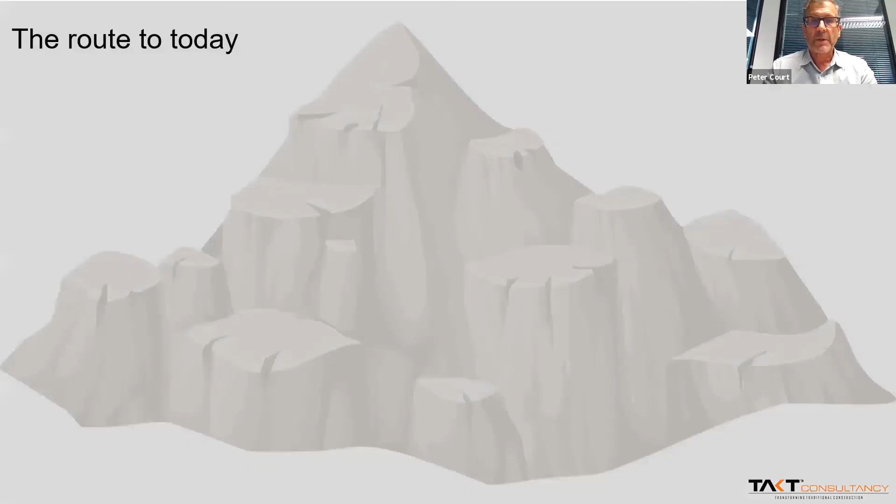So I'm going to whiz through this fairly quickly. I started life as a project engineer in ventilation, where we used to do our own drafting, engineering, and commissioning. And as you become better at that, you then get promoted. So that happened to me. I became an operations manager in a large ventilation company, ABB Flakt.

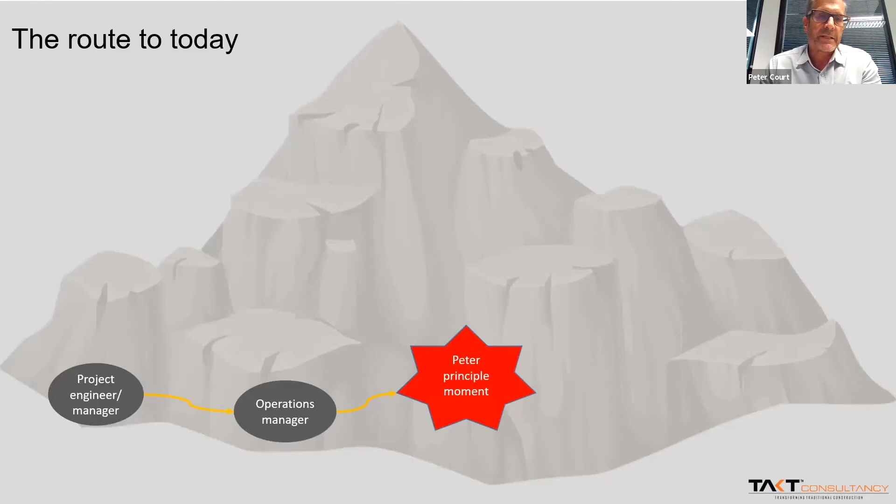And that led me to believe, by becoming an operations manager, that I'd hit my level of incompetence, I call it the Peter Principle. So I had a realization of that at that time. So being a self-developer, I undertook a diploma in management studies, because I thought, well, I'm an operations manager and I need to learn how to manage people, not just projects. So that made me a slightly better manager.

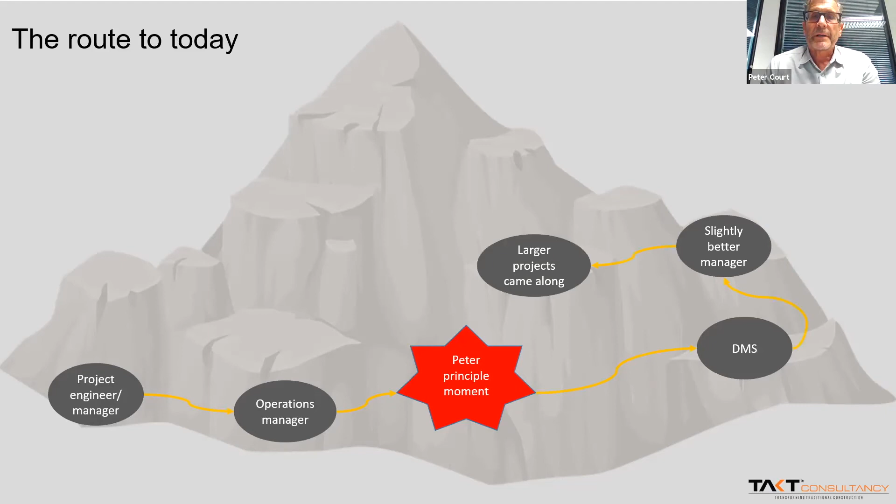And then larger projects came along, and that meant managing different people on more risky and complex projects. That led me to another Peter Principle moment, because as I'll describe perhaps a little bit on the next slide, a construction business is the sum of all of its projects.

So each project is a business in its own right. A large project has an impact on a construction business, or in my case an MEP business, and it can really dictate the outcomes. And that also flows into customer satisfaction, because if projects go wrong, then it displeases everybody.

So I undertook an MBA on the basis that I could either become a better line manager or manage larger projects, which requires a different skill set. So then big projects became larger and more complex, and I'll touch on some of those shortly.

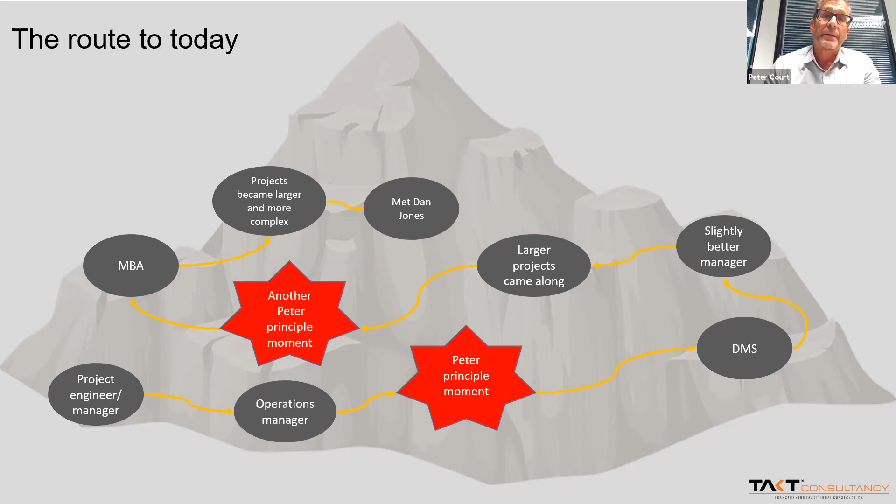During the implementation of one of my projects, I met Dan Jones, co-author of one of the world's leading lean books, based on their research into Toyota. That gave me yet another Peter Principle, because I learned about lean, I learned how to see. So I undertook this engineering doctorate that Margie talked about, to bring lean thinking into construction as a practitioner, not just as a pure researcher. I guess I could classify myself as a production systems implementer in construction.

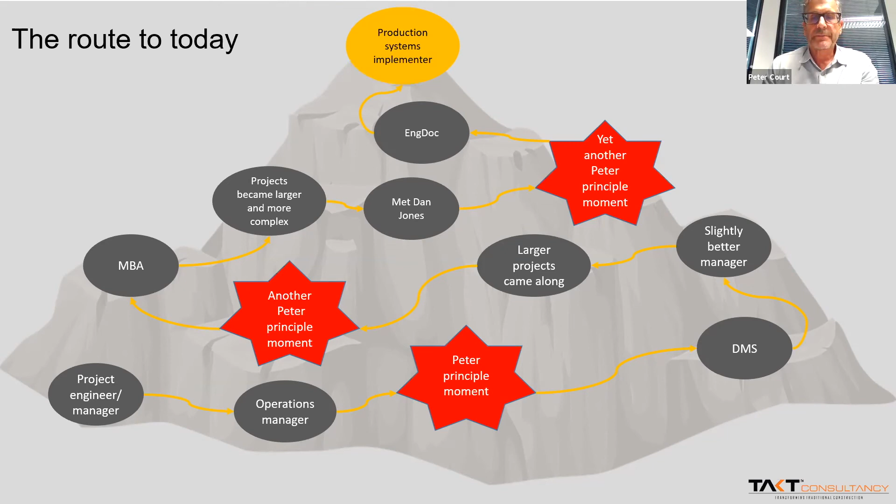So I'm just going to tell a few stories about my projects. The first major project I undertook, about 1990, was the Channel Tunnel ventilation - this was 4 main fan stations in the UK and France. The system comprised running tunnel smoke ventilation and service tunnel pressurization. So big, heavy engineering projects - still MEP, but a different scale of MEP.

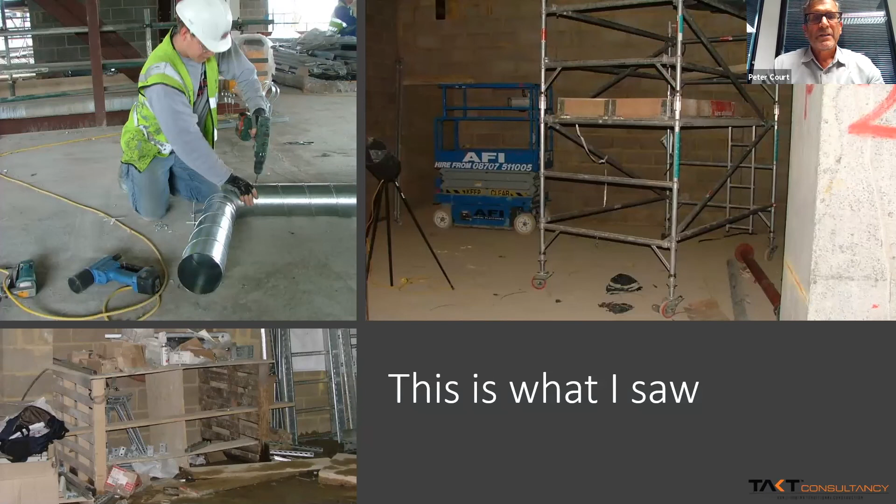So in learning to see, this is what I saw. Just walking around the various projects that we were involved with, I took pictures, and I've taken thousands of pictures, and these were from 2004, something like that. So generally quite poor. You can see from these pictures that process waste is prolific.

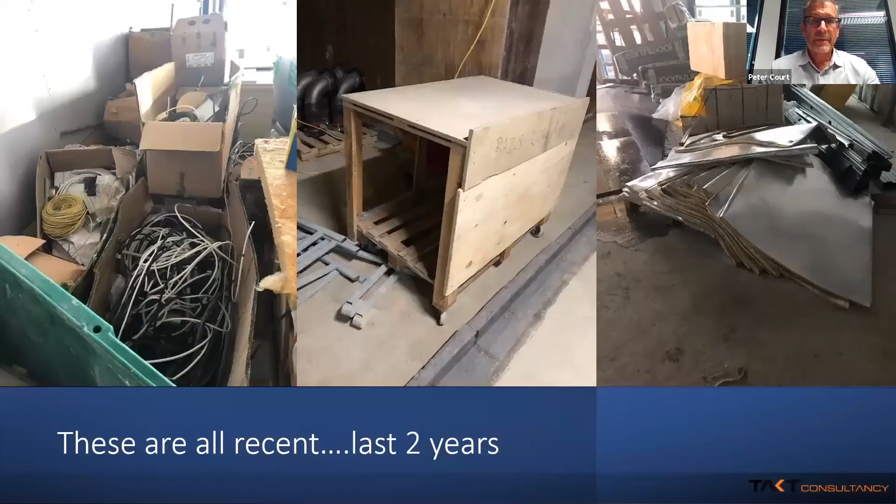Sites are generally congested. Workers improvised, they weren't provided with the appropriate equipment. Workers were generally fitted to the work in unergonomic ways. Trade stacking, out of sequence working. The work was unbalanced in terms of the time allocation between various trades. Damage was rife, leading to snagging. Quality was generally poor.

And that didn't stop there, because I've taken recent pictures just walking around different sites, and it's the same sort of thing to a greater or lesser degree. Some sites are tidy. But as you can see in that middle picture, that's Baz's workbench. He's made that himself, got some casters and a pallet and knocked some wood together. That's his workplace, because we don't generally provide the right equipment for our operatives.

And I got the concept of that from period flow control, which is referenced in a document I'll come on to next. Quite an interesting read. I think it was how Spitfires were built in the Second World War.

This is about feeding the right amount of equipment at the right time to each team, and the team cycles on to the next zone the next week, and the next team comes behind him. So this could be the module guy fitting modules, the next guy could be fitting branches off modules, or ductwork, or dry lining, etc. It's about balancing the work.

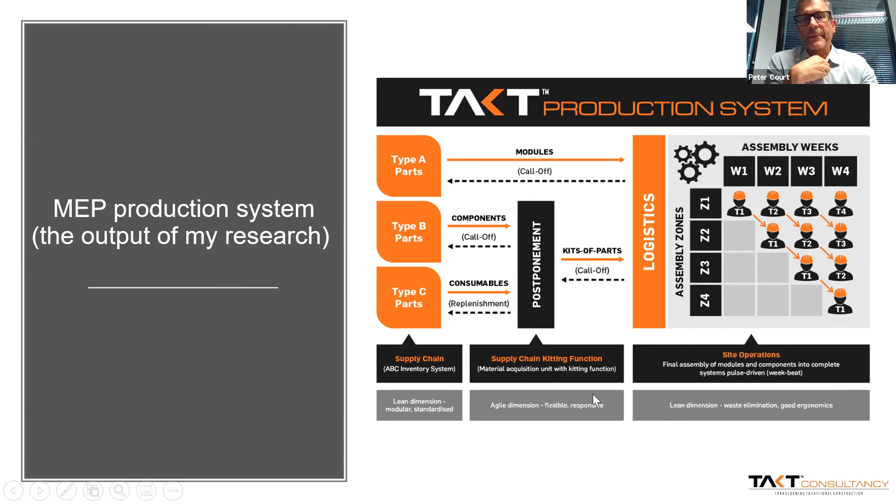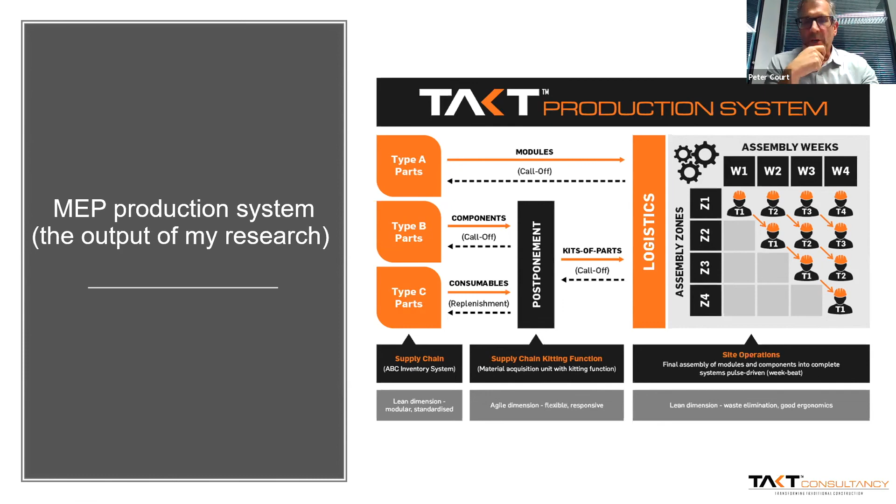And the agility dimension is because no two zones, if you're building a hospital for instance, no two zones are the same. So you want to be able to, either on a Kanban basis or the way you assemble modules, which I'll come on to in a while, that gives you that agility, because not everything's the same. It's called mass customization, which I can describe later.

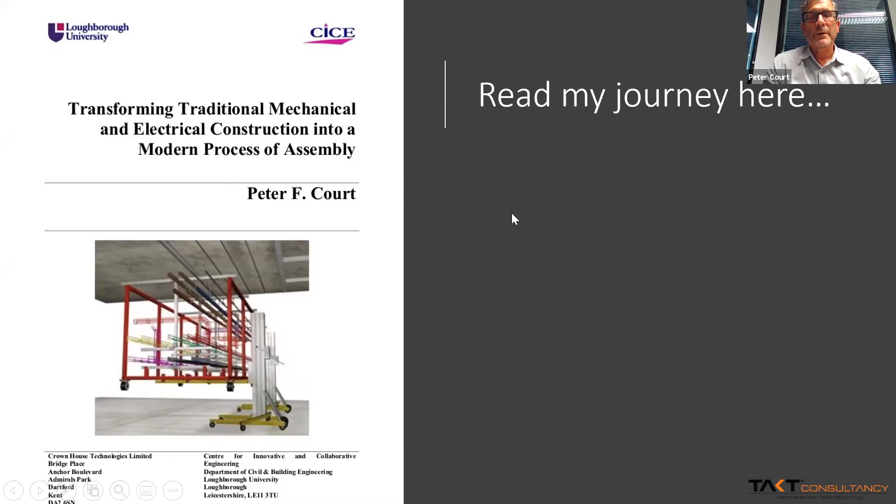So I could honestly talk about that forever, but I can't, because I've got 45 minutes. So it's all in this, my thesis, and it's in plain English. So please feel free to just download on that title and you can get the whole thing.

So yes, my director at the time, he was my industrial sponsor for my engineering doctorate, and his instructions to me were, don't screw it up, because there's a lot at stake.

The MEP element of this job is about £100 million. The labour content, especially if you're self-delivering and you include the labour content of specialist subcontractors, is about 23 to 25% of the value of the project. So that's £25 million on a £100 million project. If you slip 10% productivity on that, that's £2.5 million, which is 2.5% of your project value, which is your net margin.

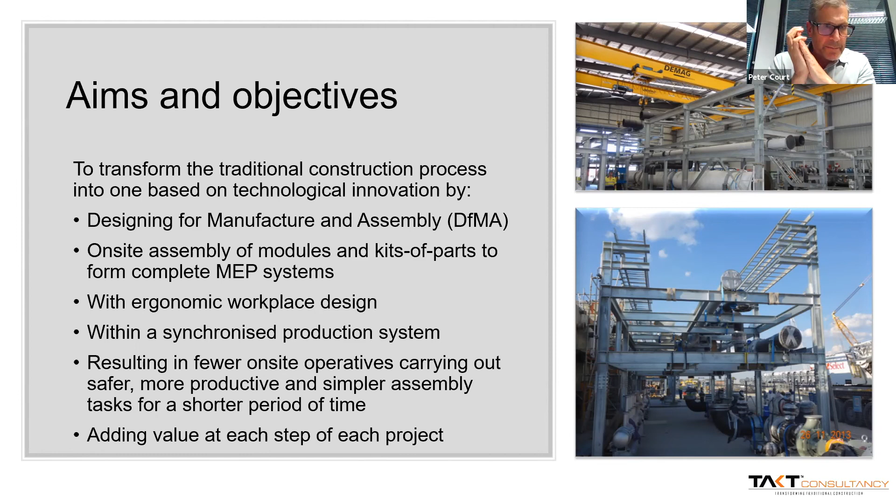So in a lean system, the customer is the next step in the process. Obviously the completed facility, the user or the owner or the occupier of that facility, is the customer of the previous step, which is commissioning. And commissioning is the customer of the install. Generally installation overruns, commissioning gets squeezed, and then that delivers a poorly commissioned building. Not always, but there's lots of research papers that say it does happen frequently.

In terms of implementing this on projects, the biggest message is that you have to create this, whatever it is, whether it's a production system for creating projects or just DfMA. Lessons I've learned are that when you're too far down the design funnel, it's too late, you have minimal impact. This design funnel represents the start of a design process where you want to iterate your design, choosing by advantages, etc. As you move down the funnel, you're increasing the definition of what you're designing, integrating things, and then things start to get locked down.

This can be LOD 400, for instance, or this can be LOD 250. The two different funnels are: if you've got your own module family or component set, then your funnel is narrower because you've made some decisions already on how you're going to do things. It's obviously wider if you don't have that.

So there's really a benefit of strategic and technical solutions, but the success really starts by creating the environment that feeds this process. I'll put some general headings here: understanding the customer's requirements, since the customer might not be interested in DfMA, especially if it's got a premium cost, which in some cases it can. Also the core values of the business.

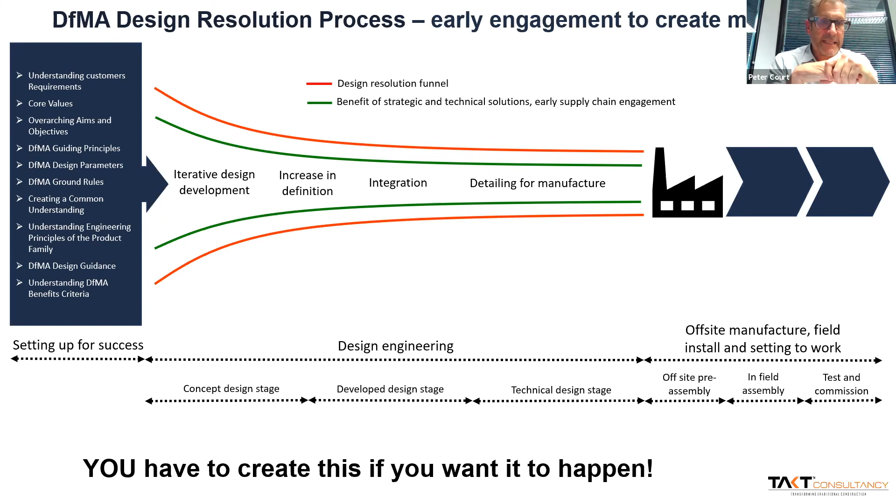So a review of the MEP component set: it's about understanding the MEP design, and MEP systems pass through buildings from the large end to the small end - the large end being the prime movers, the plant rooms, and the small end being the point of use, which could be a sink, electrical socket, or air conditioning unit. Then identifying those into systems and grouping them in such a way, deconstructing that design, and then reconstructing it with the product family.

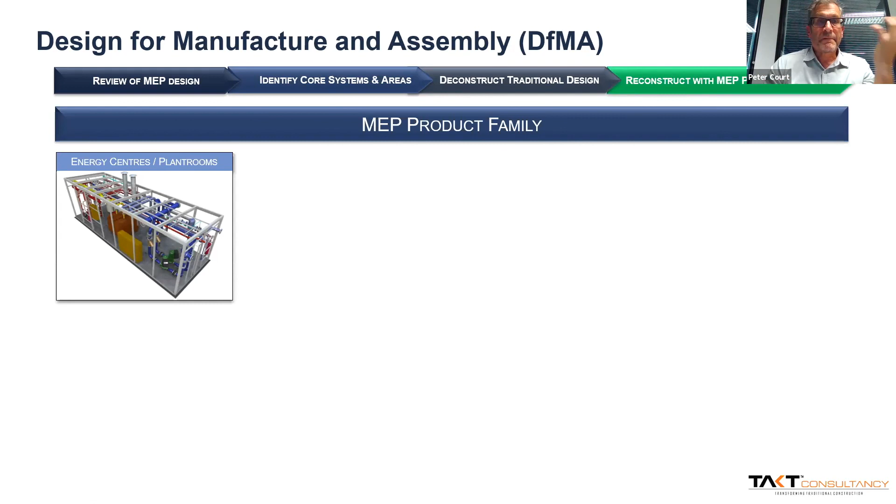That starts with energy centers and plant rooms, volumetric space, plant equipment modules. These might fit within a building plant room, onto a concrete slab, on a roof, etc., but within a larger structure where they don't have their own structure.

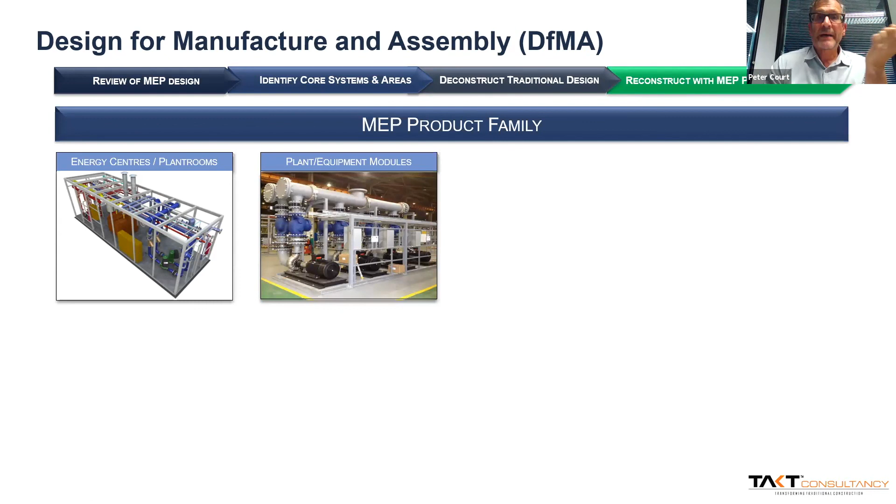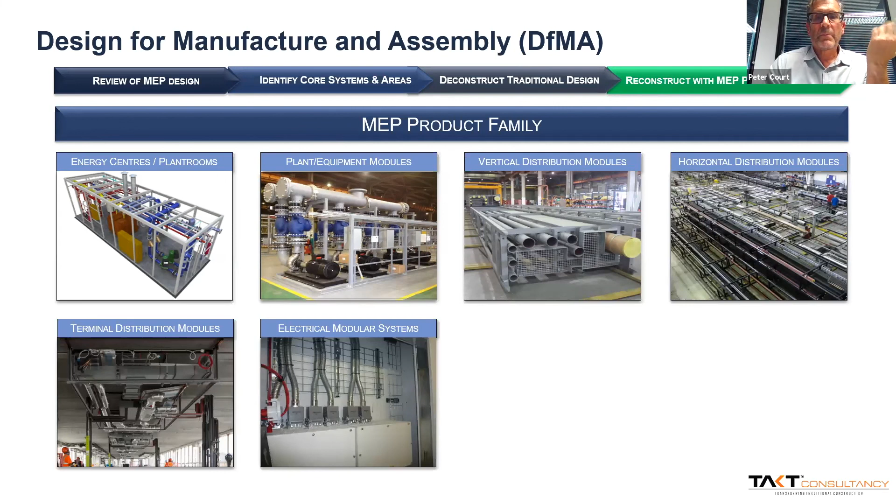Vertical distribution modules, also known as risers, horizontal distribution, terminal distribution - which in this case is fan coils - modular wiring systems, bus bars, volumetric spaces which can be IT hubs, whole operating theatres, classrooms, bathroom pods, and kits and parts. Kits and parts are everything that connects modules together and modules to other things, which could be field-mounted tanks, underground piping, etc.

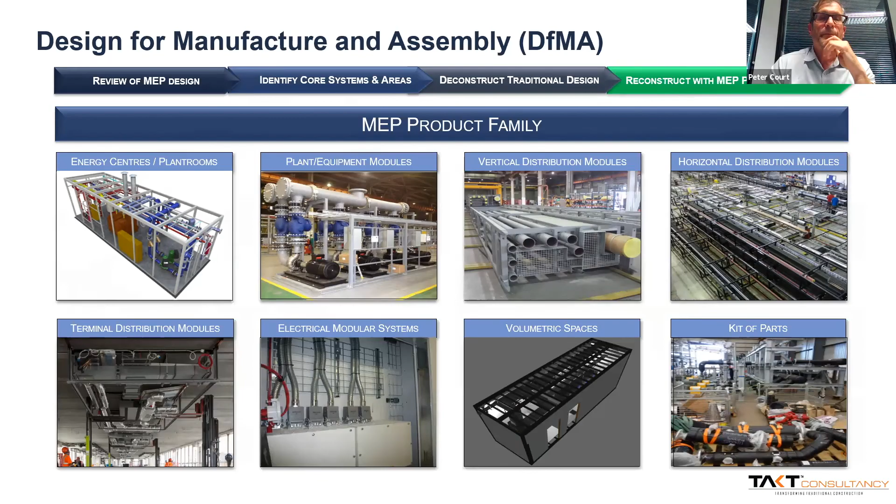So these are just samples of composite plant rooms. The one on the left is too big to get on a lorry itself, so it's split, so all of your field joints are along the joint line. And that's what it looks like when it's installed.

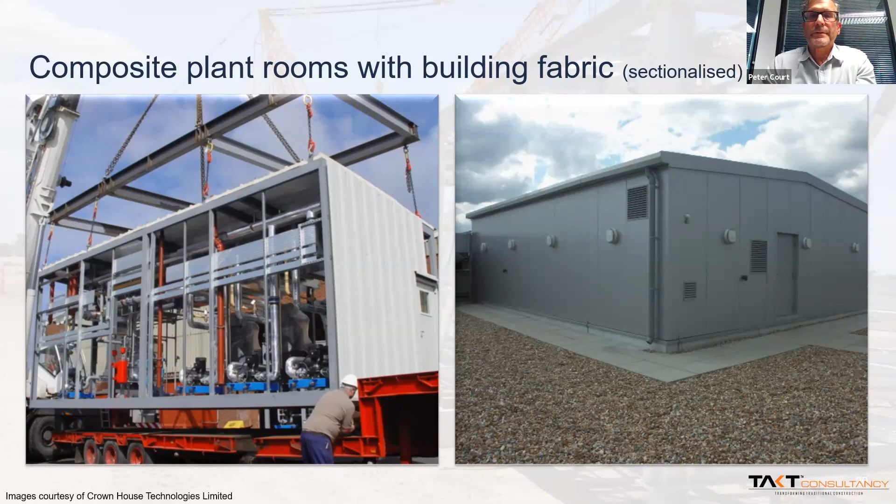Composite plant rooms - just to focus on this, you can see a lot of framework and you can see floors. These floors, for instance, add value for the purposes of mounting that equipment and transporting it to site and placing it in position. When it's installed, it doesn't add value because you've got a floor on floor. I'll come back to that shortly.

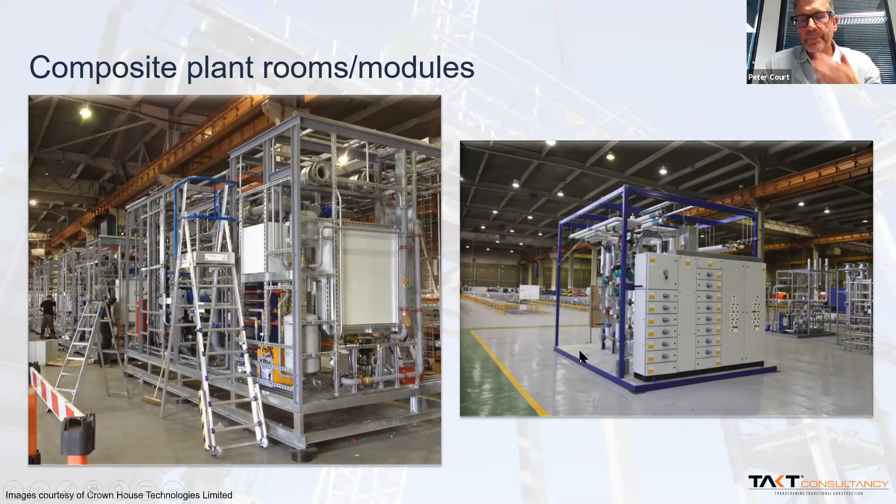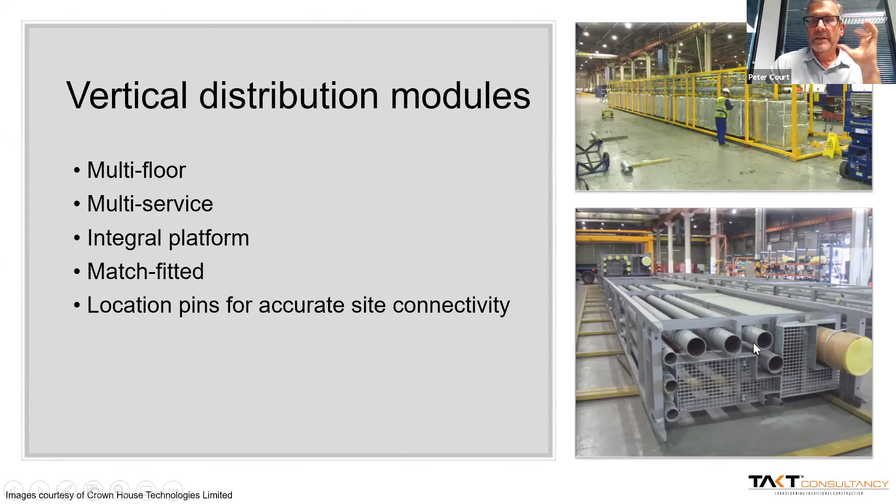Vertical distribution risers are built in line, and you build so many together and then dispatch however many you need for consumption on site. The last one remains to be connected to the next one. And these all have large, in this particular case, location pins, so when they come back together on site, all of these services align perfectly, and it's just a matter of clamping them together. As you can see, they've got riser floors as well.

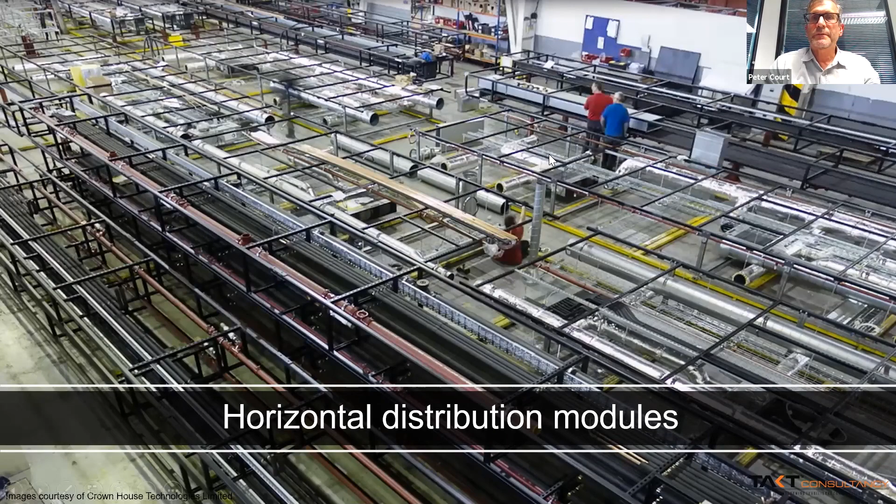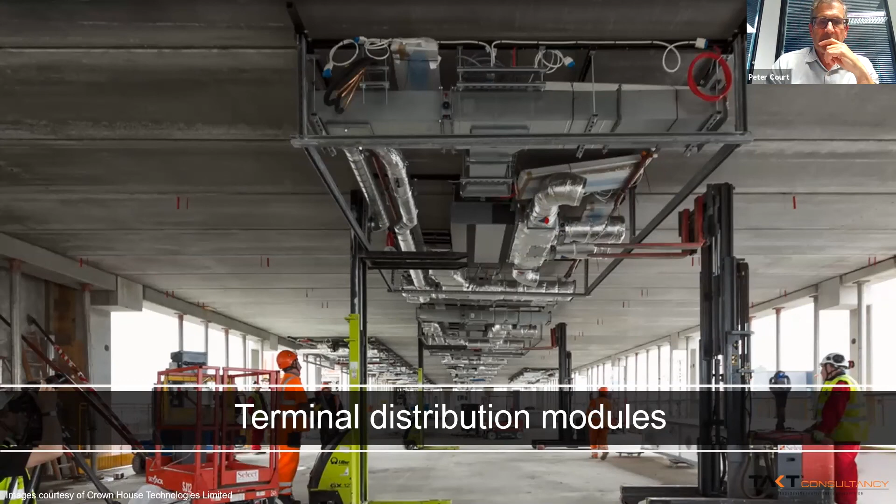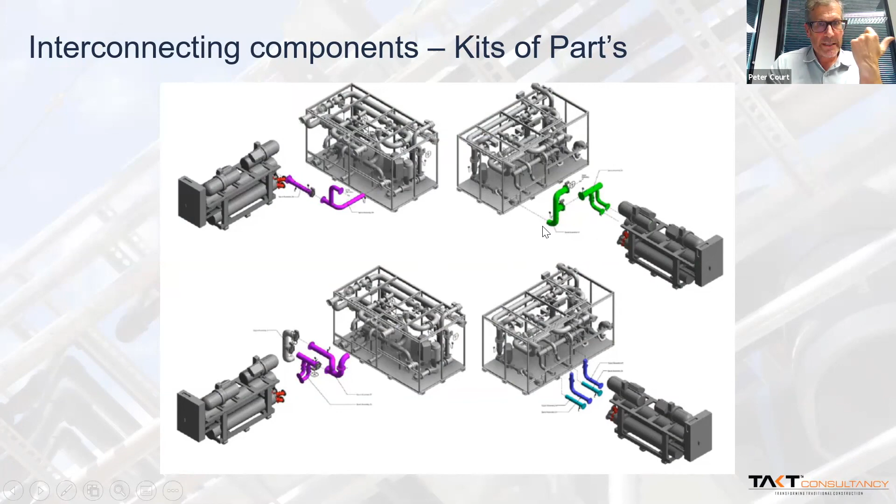And then interconnecting kits of parts, because you get great value from installing modules quickly, but then you want to connect them up quickly, so you build whole plant rooms in much less time. But again, you'll see these modules are characterized by lots of steel.

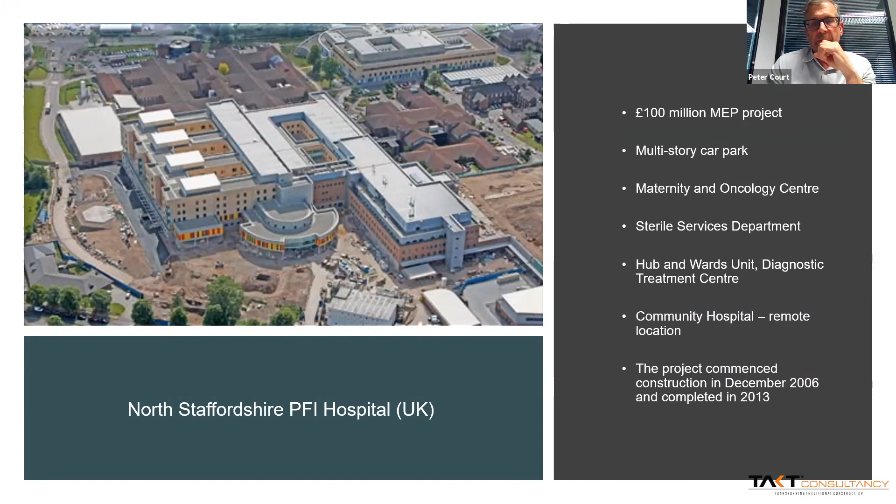So the main features implemented, the production system, synchronized workflow, and to synchronize the site element, or the in-field element, has to pass right through the value chain - through manufacturing, through procurement, into detailed design, back into design. So you're getting the right drawings at the right pace to suit the takt time of the project.

Planning and production control using Last Planner, digital engineering, ABC analysis, DfMA, takt planning, mobile work cells. Just to touch on that, we worked together with groups of pipe fitters, duct fitters, partition guys, electricians, and designed particularized work cells for their phase of the project.

So when you're in a big open space, the characteristics of the equipment changes to when you're going in and out of a completed room - second fixing, putting lights in and grills, etc., and creating a common understanding.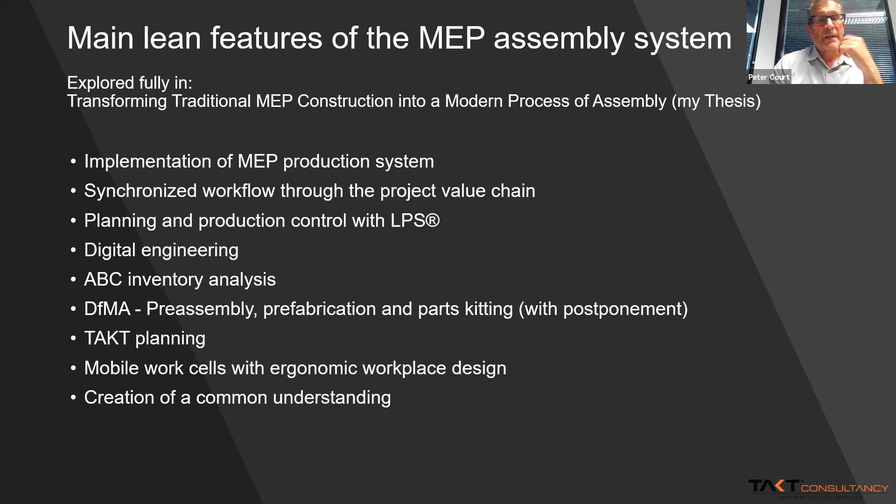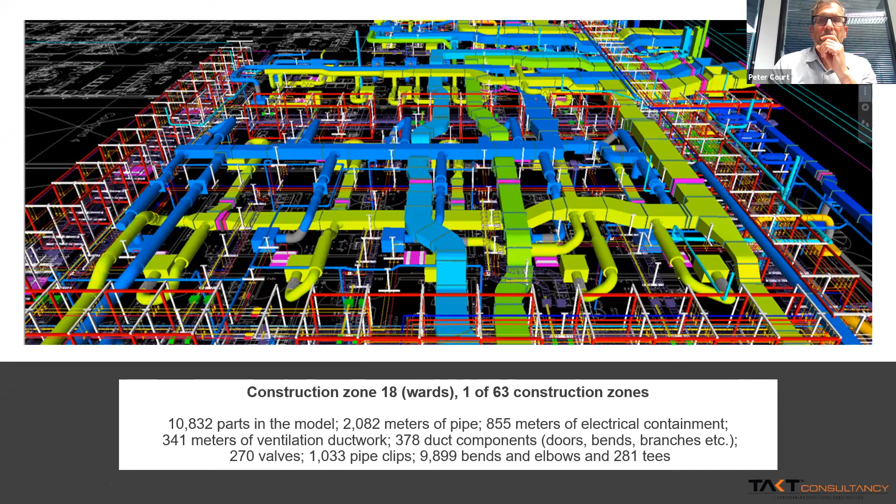So that's just a snapshot inside the model, and every component was a specific object.

So when we looked at the amount of corridor modules, it was about 1,200, and we thought we're going to standardize on these. So we had, in agreement with the architect, 2 corridor widths - hospital street and a normal corridor - and 2 ceiling depths. Sometimes you have a 2.7 meter ceiling, sometimes you have a 3 meter ceiling in operating theatres, for instance. 4.2 slab to slab.

So that gave us 4 types of framework that then supported the services within it. So in the hospital streets, we put everything that was maintainable - all the electrical functions, electrical services, wet services, medical gases, etc.

That was a high cost of framing all of that relatively low value contents. So we developed an ATIF, assembly transportation and installation frame, which is used for assembling, transporting and installing, and then reused. This is a short video clip, hopefully it works.

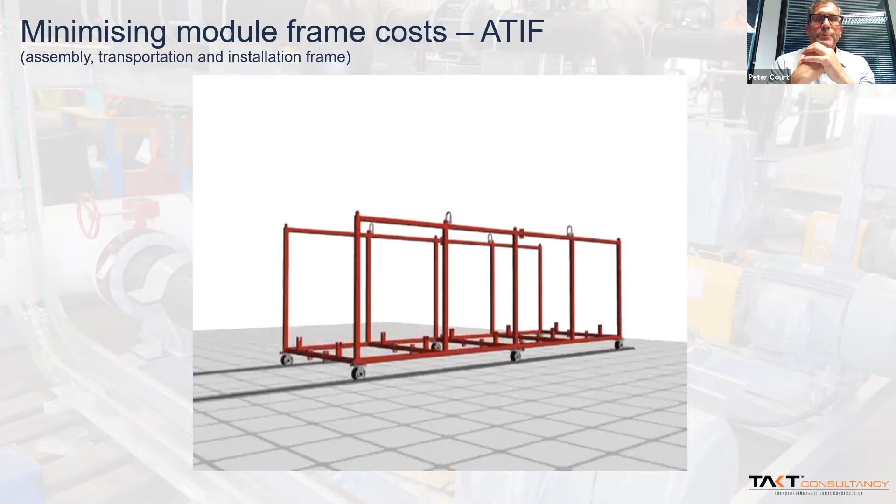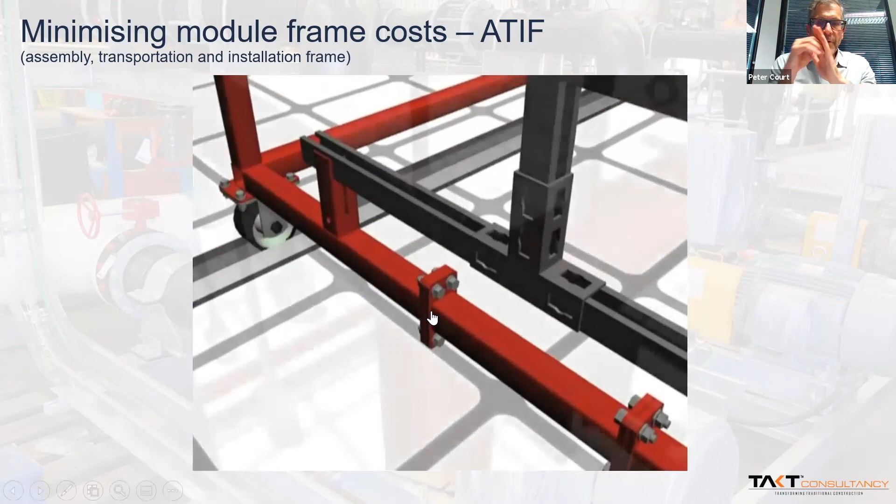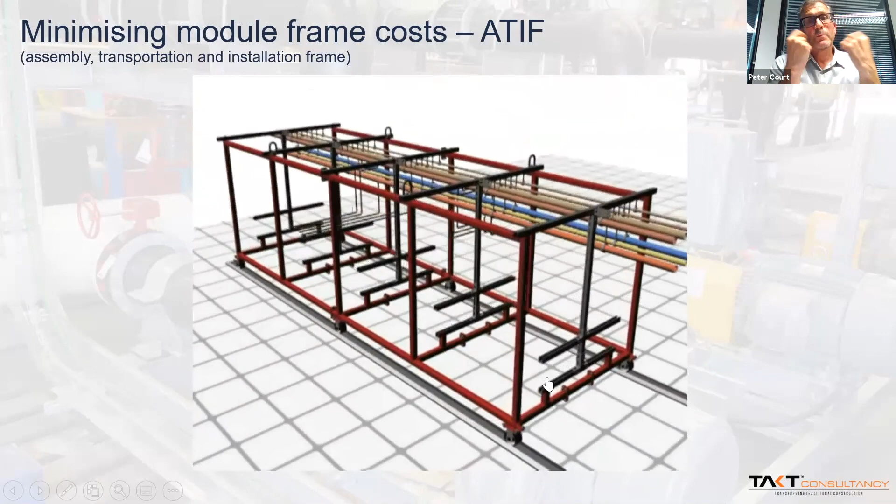These are 6 meter long modules. The module frame, the ATIF, was 4.8 meters, so you had a 600 overhang. Connecting to the next gave you 1200 centers for the brackets, which is the design. We put a matrix of cable tray in there. We weren't interested in reducing it down as cables peeled off, because that's a penny, so we just standardized and put a matrix everywhere.

This is what I call mass customization. The piping was configured to the room it serves, so that was all built as spools from the model and then assembled to that particular module located in that particular space on each floor.

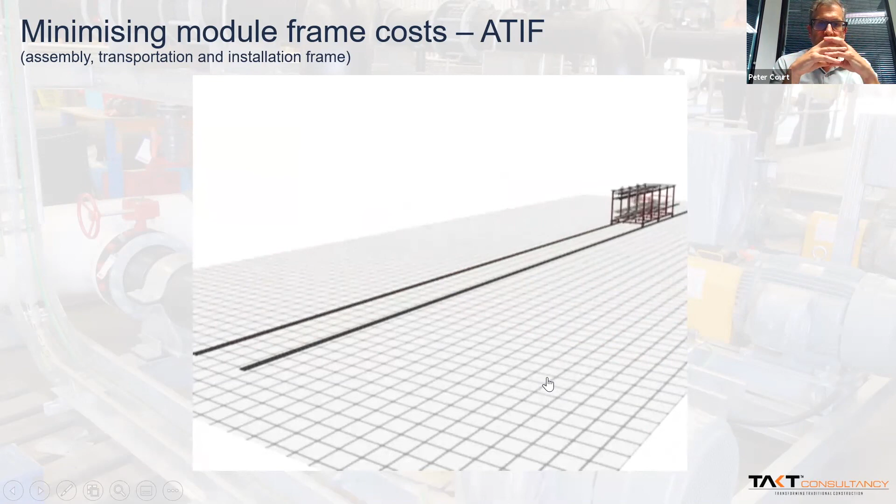So 5 were built together, 4 went to site, 1 remained, so we get connectivity, and then the next 4 or 5 are built up to them. They come to site with precast modules in tram lines, as you can see, which cross over with the unistrut frames, bolted into those, and the frame drops away.

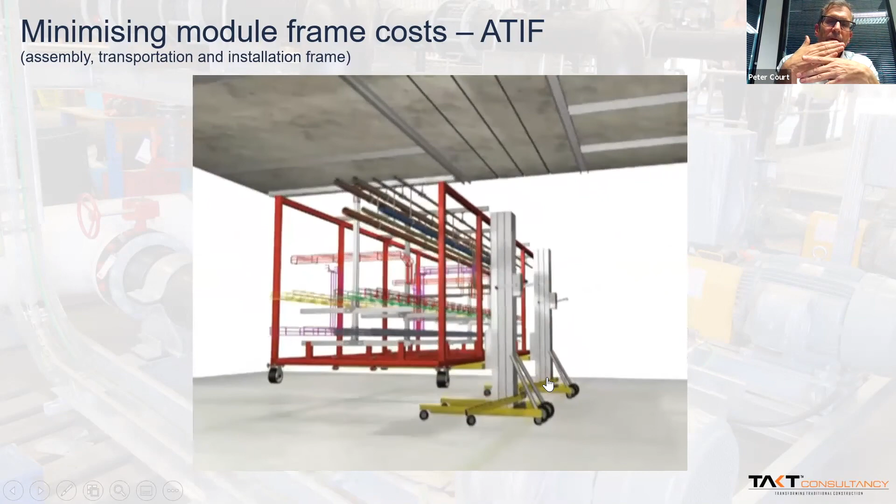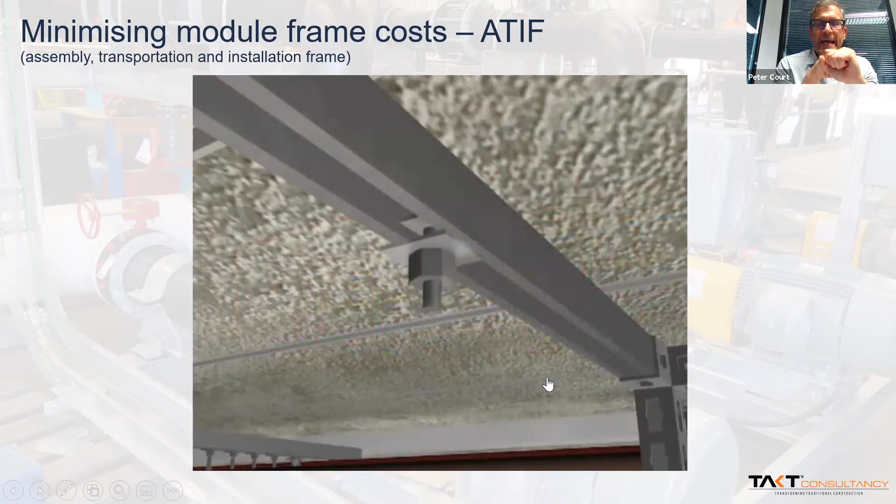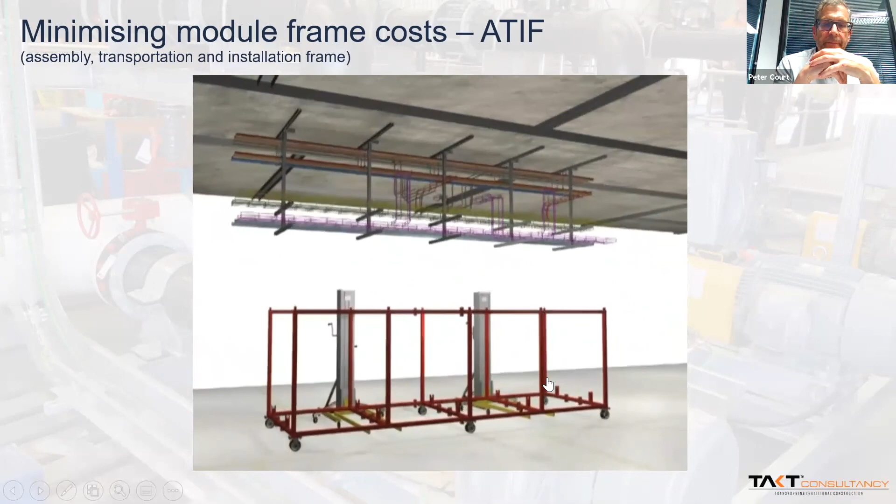We had 40 of these ATIFs and 1,200 modules, so we really drove the cost out, and those frames can be considered an asset for your next project. They're reconfigurable because there's spaces in the middle to change the widths to suit different corridor widths, and inserts for the different heights. So they're mobile jigs in essence.

These are the modules in our facility. Line side, we had the 40 frames, and as the different modules were configured, the frames were changed as they came back from site, either narrower or shallower or one or the other, and then reused.

So there's that note about the 1,200 modules and 40 ATIFs.

The first trade here was fitting the cast iron drainage, and then the modules were fitted, and then ducting was fitted afterwards because some of that threaded through the modules. So we wanted those modules in place first.

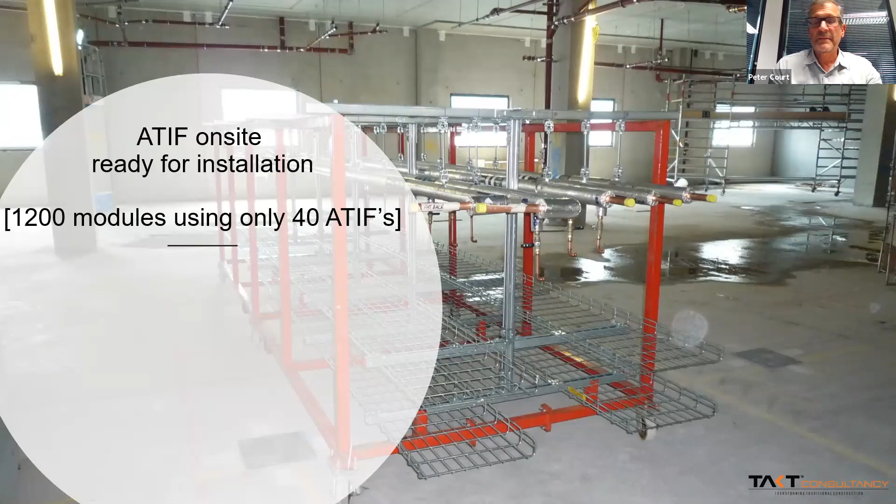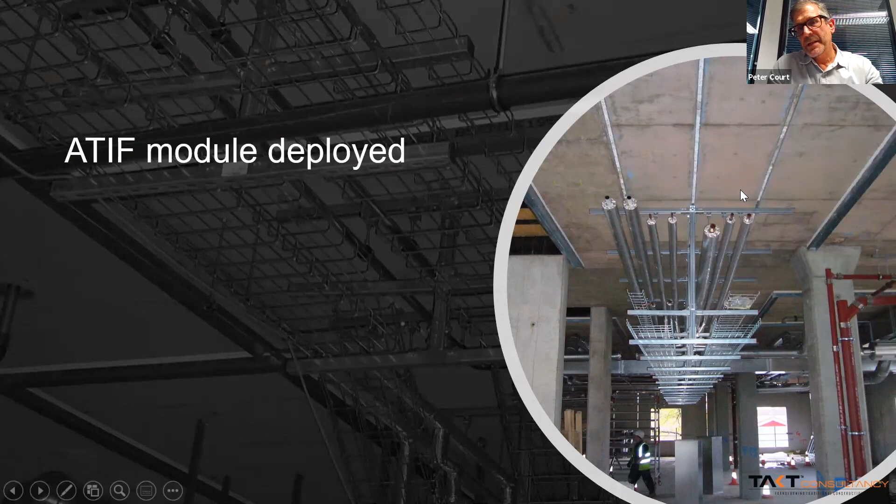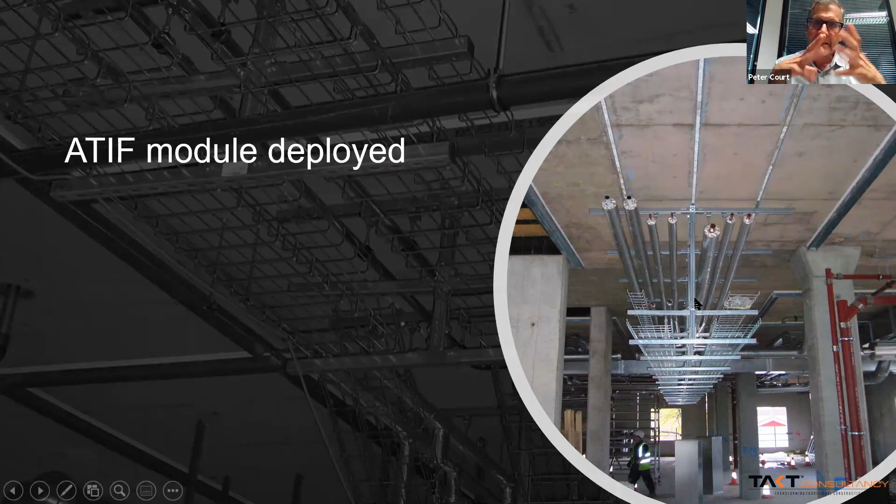So that's with the module deployed. From a tolerance point of view, these were cast-in inserts, and these were not that accurate, and we expected that — these are precast slabs. So that didn't matter, because the tops of these were slotted, so we could pick up, if this ran this way we could still pick it up here. So we compensated for the difference in tolerances between MEP and structure.

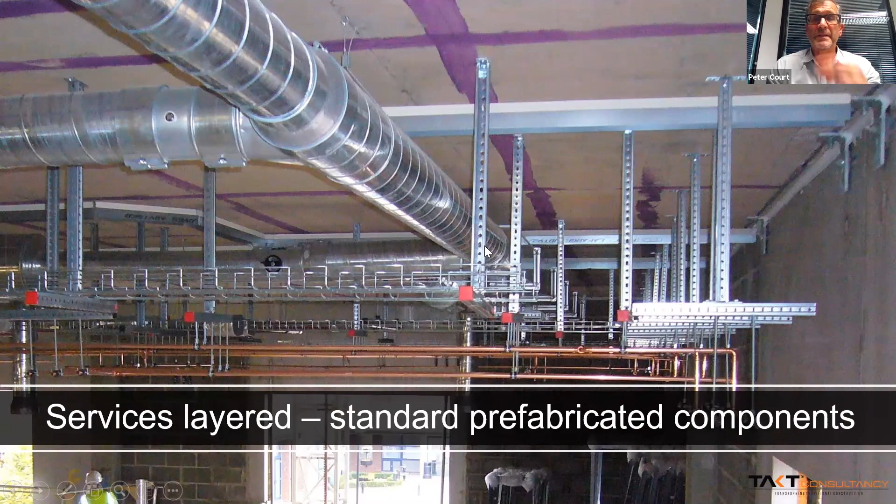And then everything else, parts kitted — all the sub-supports were pre-assembled and standardized. So you either had containment area or you didn't, electrical basket or you didn't, or you just had piping below, or you had both. So we just had hundreds of these made and delivered on carts to the point of use.

All the other consumables were on trolleys that we designed with large center wheels and casters at the end so they could rotate on the center axis, and they were topped up. It wasn't a perfect Kanban system, but our logistics team just topped up when the bins were empty or getting towards empty, so they never ran out of nuts and bolts.

We weren't too worried about theft, which is fairly prolific in some areas, because it's low value. Where we had copper piping, where we're field running branch piping that weren't on modules, then we had secure trolleys.

Same thing with cast iron fitting. These came from the suppliers and they stacked on top of each other when they went back. Large wheels to maneuver, very useful trolleys, and heavy duty because cast iron piping is quite heavy.

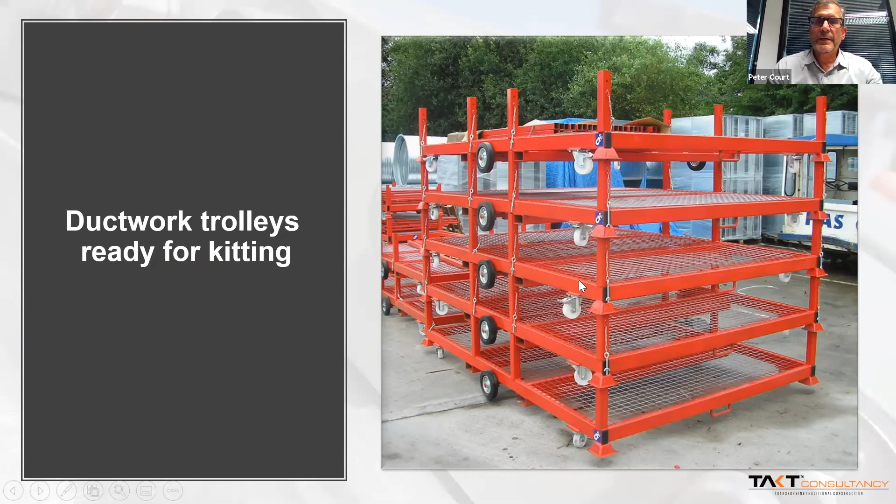And then ductwork is the same — you can see this waiting for loading in the ductwork yard, and then delivered straight to the point of use and put into position.

Just to touch on that, our duct fitters would normally allow 18 meters per day per pair — that's an operative and a mate, as we call them. We got them up to 40, not just by this, but by facilitating their productive workflow: they had their own space for one week, all the information provided, all the prerequisites, 7 construction flows, just leaving them to work through that.

So they're just assembling ductwork. It's an interesting point on whether you should put ductwork on modules, but large ductwork is a module in its own right, and it really doesn't add value. So you don't necessarily have to do it unless it can be incorporated with other services.

So we also design these large platforms. These are on wheels with walk-up access and a large linear working platform.

Because these are the modules here, the ATIFs, and these are the branch lines that come off that. Ordinarily, these guys will go up and down in a MEWP, but traveling vertically and horizontally in a linear system is a waste because you're traveling up and sideways and up. So installing linear systems needs linear working.

So these don't cost much. They're about £50 a week to hire, and they're much more productive. You can't see it here, but we put Kanban bins, parts bins on these, and their parts were replenished at the point of use. So they don't have to come down and go get bits and then walk back up.

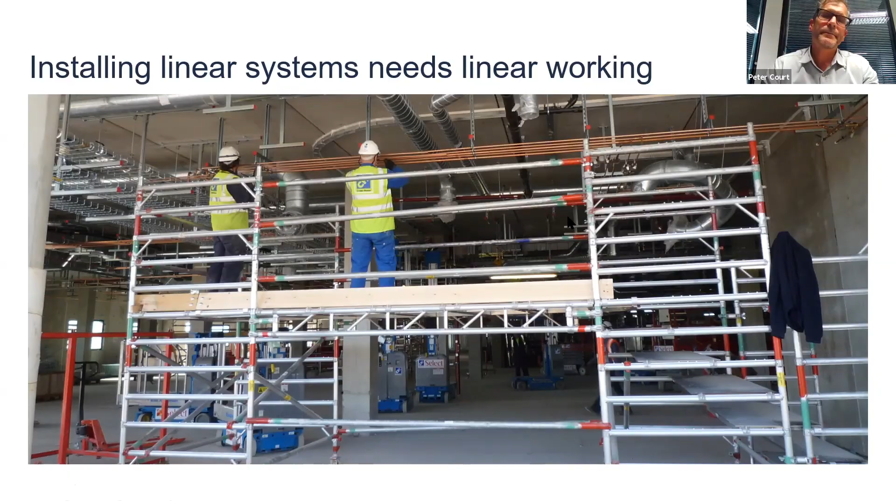And mobile information centers, so drawings. We might say, well, we don't use drawings anymore, everything's on an iPad, but we do use drawings, and they're still stuck to walls unless you provide equipment for them not to be stuck to walls.

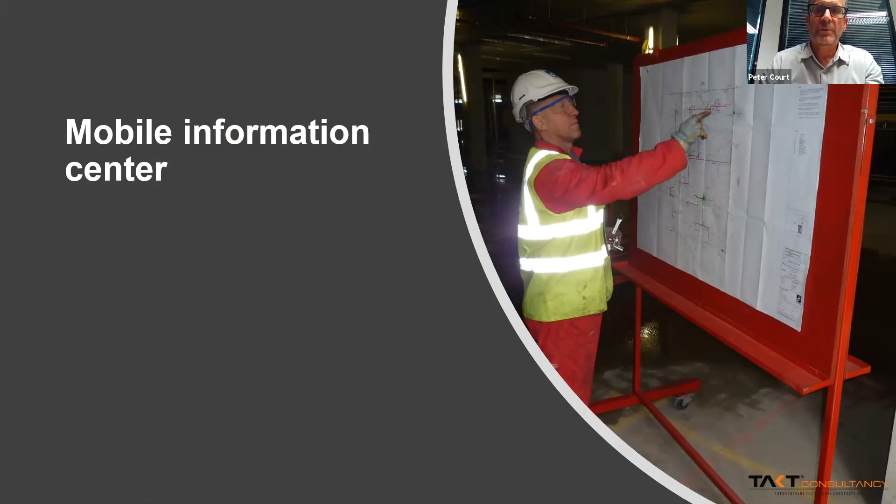So the outcomes, just checking time, sorry. Commissioning period not compressed, we had on-time delivery of each phase. The P21 was a different commercial arrangement with the client, and the client got gain share.

So we shared the profit that we made, or the lower cost. 44% was made off-site, we had almost 40% less on-site labour. Fewer workers were exposed to lower risk for a shorter period of time. Good ergonomics, improved quality of work, and there's a whole question about de-skilling as well in assembly, but that's a whole other topic, because skilled operatives don't necessarily like to be de-skilled by assembly, so that's a good learning point.

And then productivity gains by eliminating process waste. Overall, we saved 8% on our labour budget for this job, which contributed to the margin at the end of the job. And when we tested all of the other peer projects in the business, all of which were large healthcare projects not doing this, there was a lot of cost blowouts on labour. All other things being equal, you really need to control the labour.

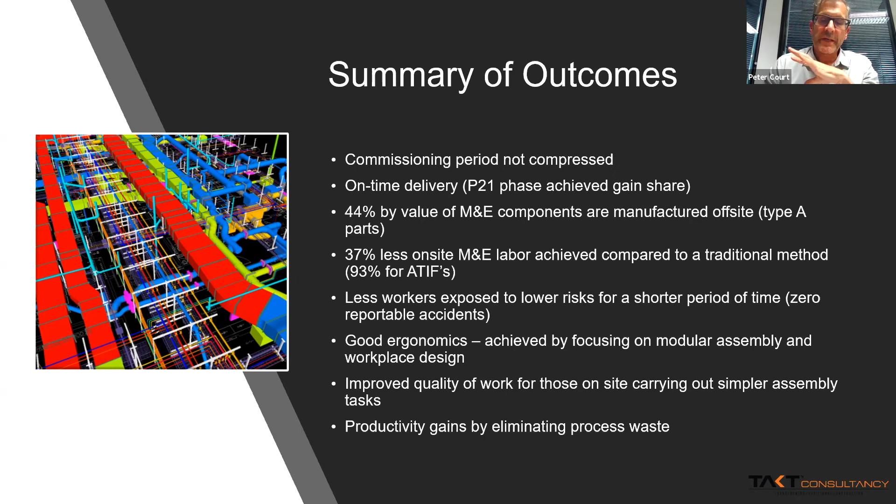So Northern Water Treatment, a complex water treatment plant. I knew nothing about water treatment, but spent a lot of time at its sister plant, watching that being built in a traditional way, then understanding how not to do that. So I won't explain all the technology, but it's basically a brine desalination plant as part of the coal seam gas.

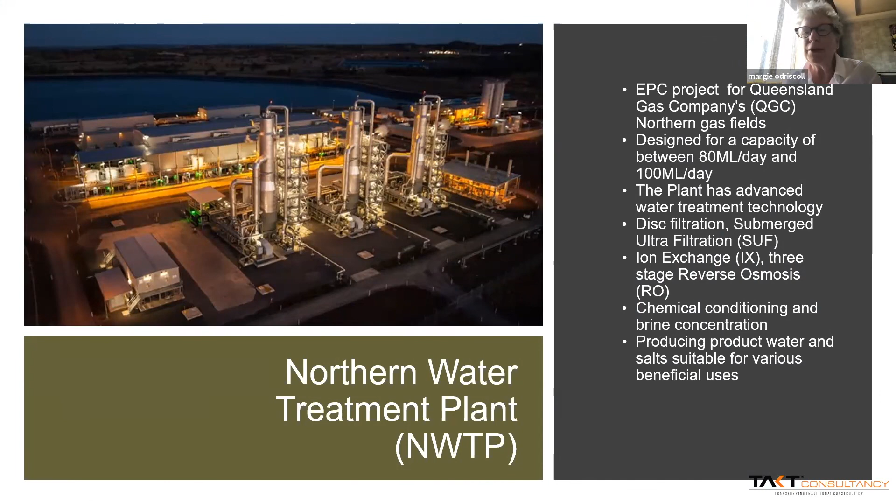Okay, so the value to the customer was to get the water treatment in place to produce gas. You can't produce gas without treating water. We were fly in, fly out, rostered work periods, and there was absolutely loads of oil and gas projects going on across Australia. So there was an extreme skilled labour shortage, difficult working conditions, and also, heavily unionised. Unions don't necessarily like you to take labour off site for the obvious reasons.

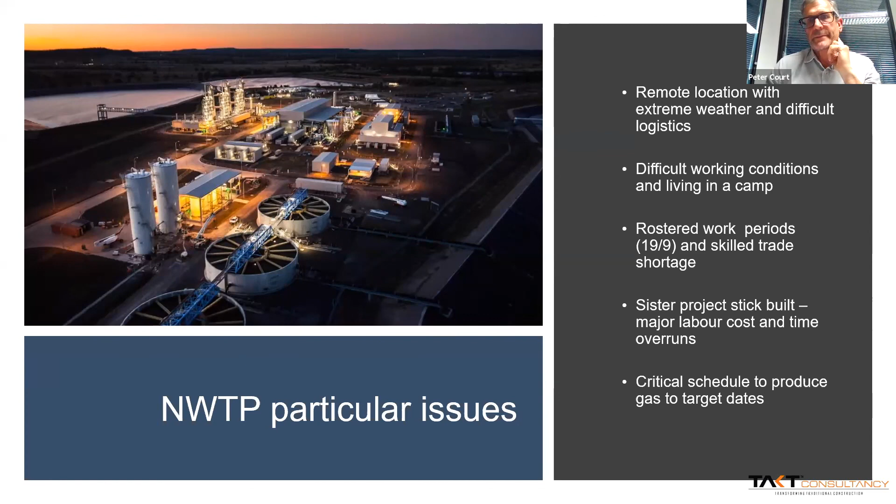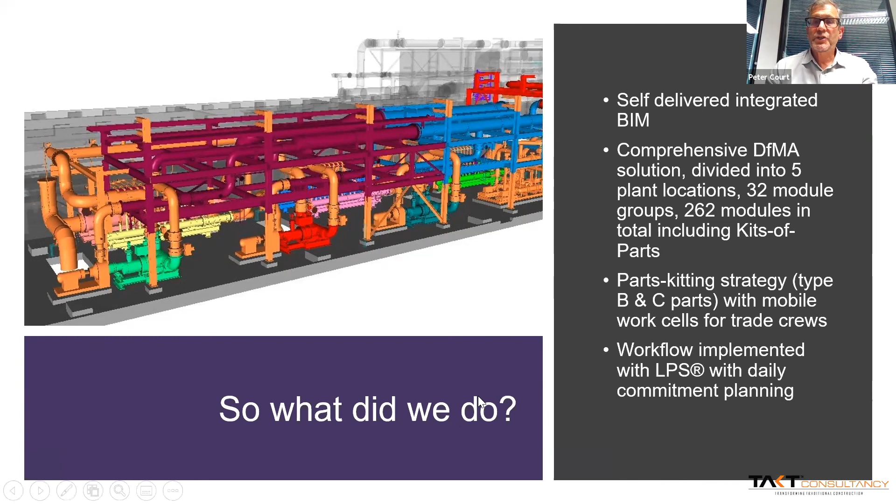So what did we do? We self-delivered a BIM model, a comprehensive DfMA solution divided into 5 plant locations, 32 module groups, 262 modules, and kits of parts. Kits of parts in this model are all the pieces that come off a module. This is the GE process equipment, pumps. Parts kitting strategy, and we implemented last planner production control.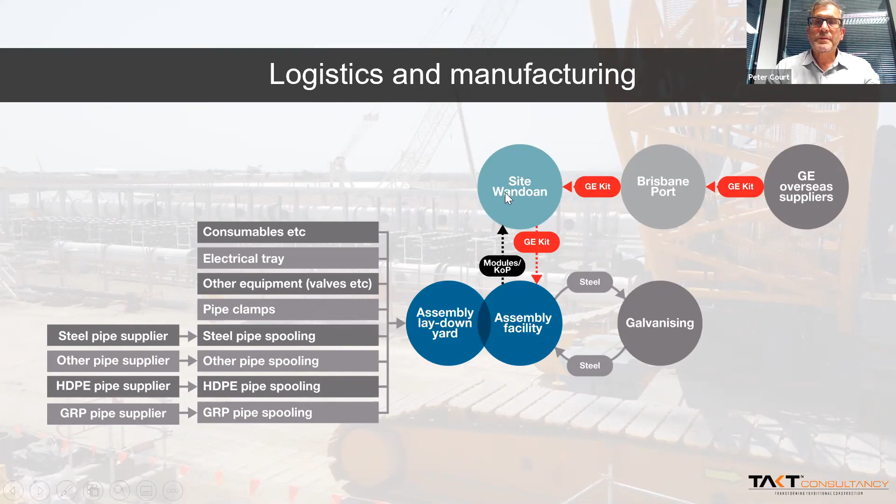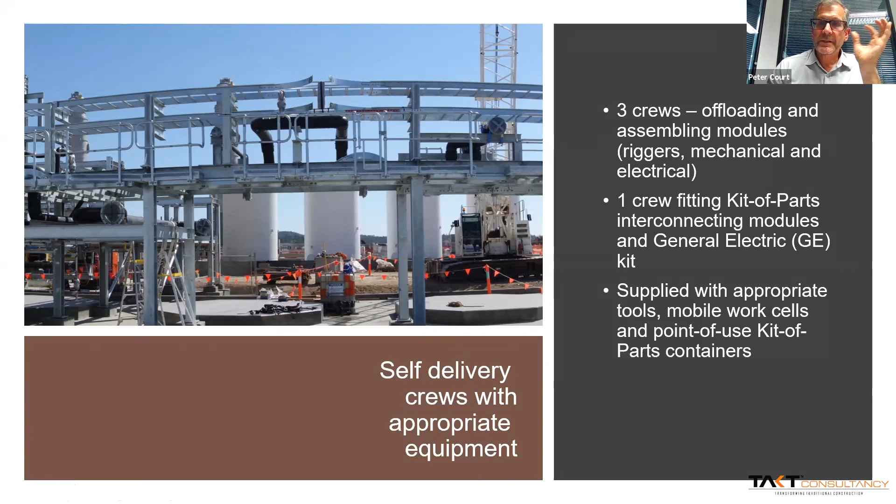So we had 3 crews offloading and assembling modules. From a union perspective, riggers did that, they could only do that. Mechanical and electrical then connected the mechanical and electrical components together. And then 1 crew fitting mechanical interconnecting parts and GE kit.

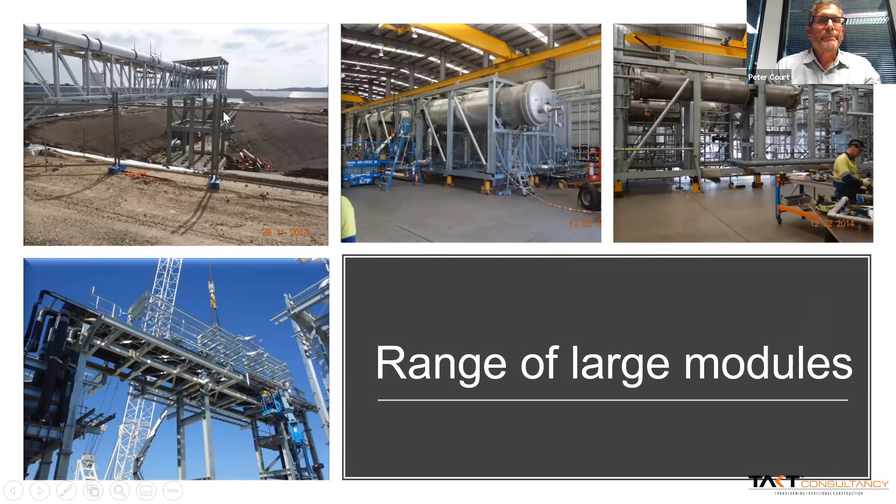So a large range of modules. These are our assembly facility. These are the brine concentrator towers, made on the side because they're quite tall. Pumping stations in the large ponds we had to build. So a full range of equipment.

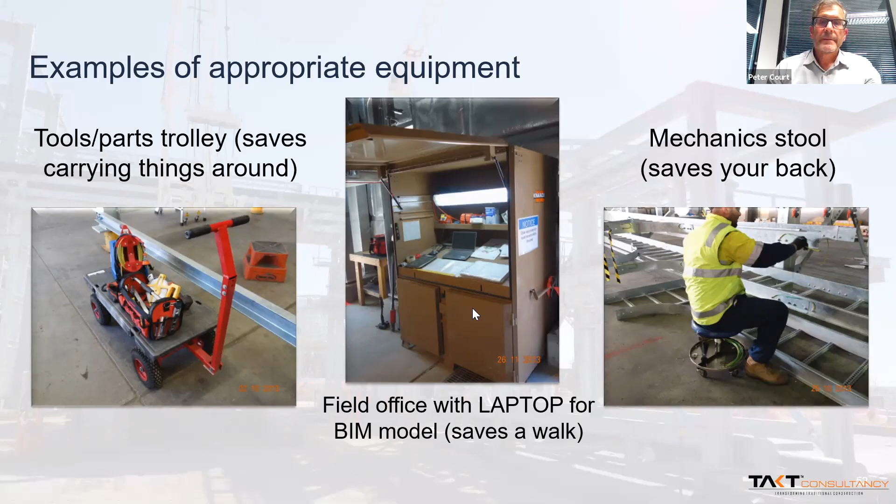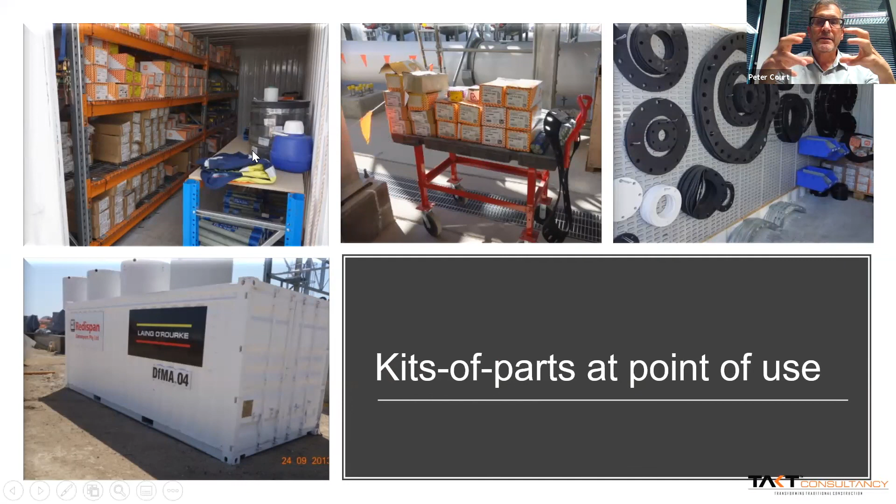We customized some 20-foot containers. So as opposed to going to a store in the laydown yard for your nuts and bolts, then putting them in a van or ute and bringing them back, we delivered all the kits and parts at point of use. We had about 20 of these. Gaskets were on a gasket wall, bolts were in a bolt rack. And because some of these bolts were pre-galv and quite large, we'd run them up here, test them all, and put them on a trolley off to the point of use.

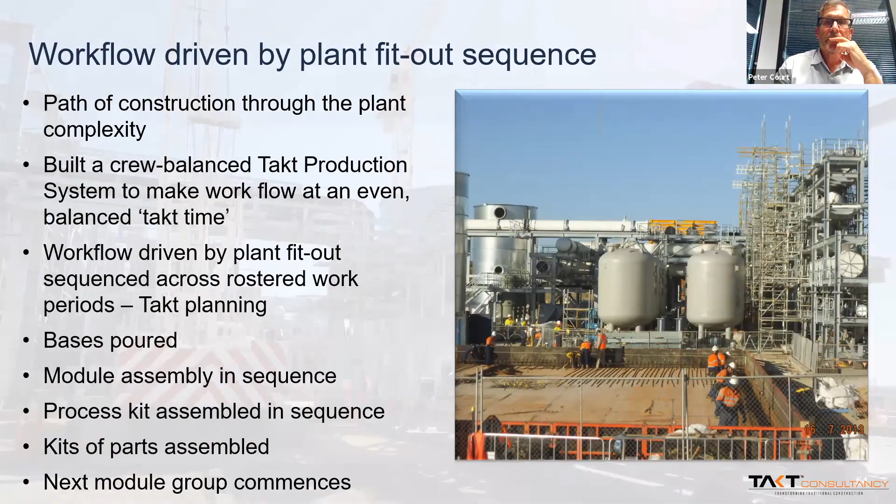Just to touch on how we did: up to 84% of large bore piping, some of it 5-foot diameter, down to micro-bore instrumentation piping. The SUF tanks were 90% off-site, clarifier tanks 86%, 70% less labor for the module groups - mechanical and electrical labor - 60% less guys assembling SUF tanks, and 60% for clarifiers.

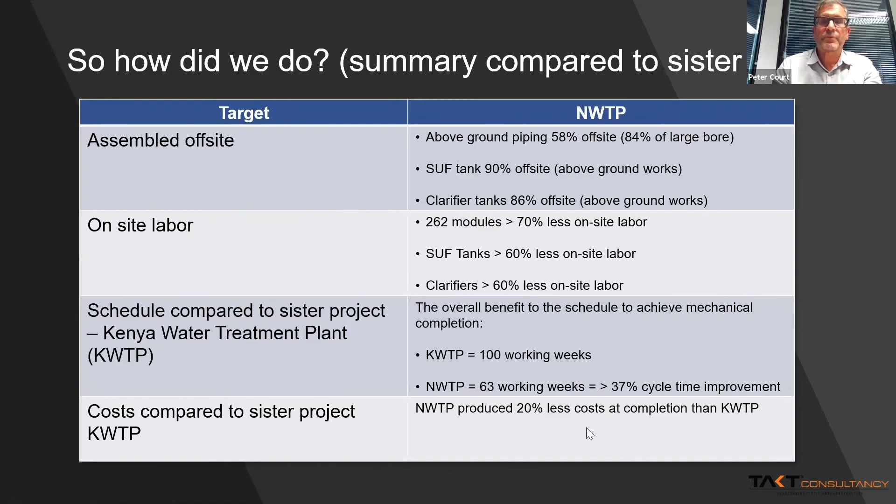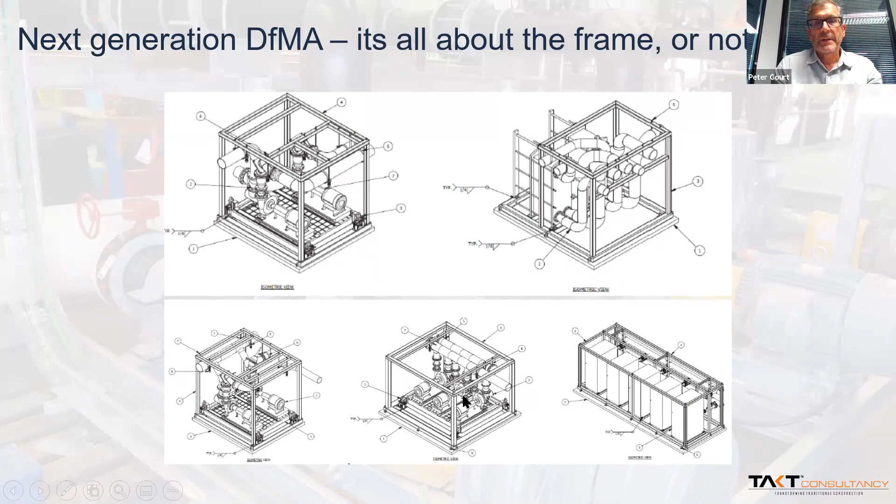Do they add value when they're installed? Some of it does. So the modules we've designed now look like this. You need an upright to support the headers, but steel piping is much stronger than the steel frame, so make that an integral part of your module. Secure it in such a way that it acts like that, and then when it's on site, you release it if you need it for thermal movement.

And a lifting beam - also make it part of the structure - adds value because you then get your motors out, no inertia bases. So the floor is the base for all of them, which is cheaper than 3 inertia bases with concrete. And you put the whole set on 4 AVs, not individually.

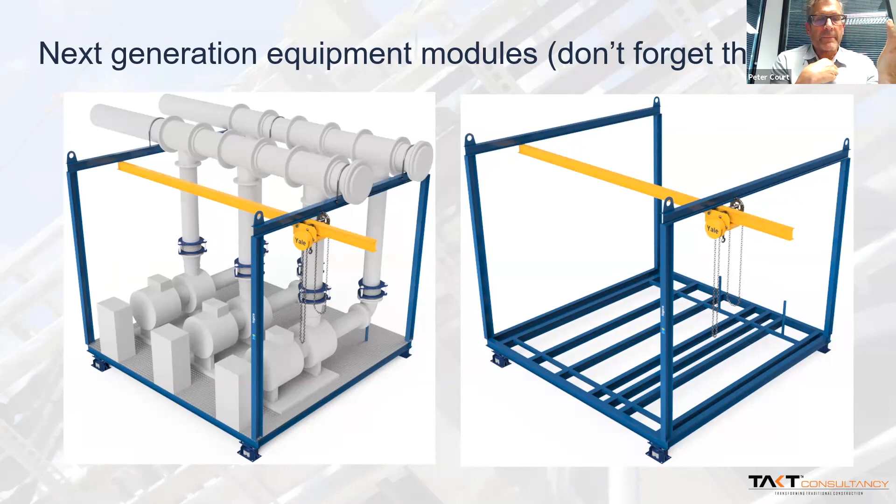So engineers design a model - this is a large distribution corridor on a large horizontal plant room. This was after DfMA development, so with an inbuilt floor. Why do that? Because it separates workflows, as opposed to stick building progressively along here and blocking access.

You can get to your joints for bolting up, you can pull your cables, and you've got it for access and maintainability in the future. If the customer wants to reconfigure, change cables, add things, then you've got accessibility. So at a very small cost, you're adding a lot of value from a DfMA perspective.

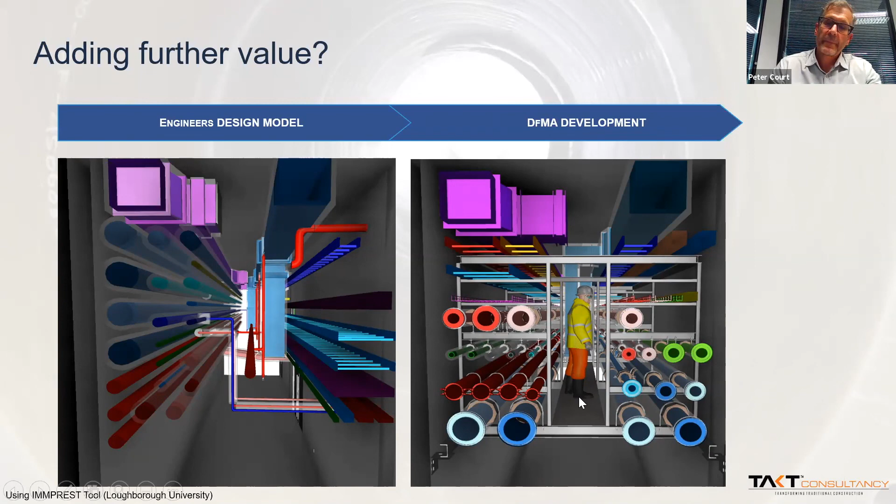And then services distribution, some very clever, agile bracketry. This is pre-manufactured and it's seismically rated as well. It's infinitely variable - it's like a Meccano set, for those people who are old enough to know Meccano, which unfortunately I am - it's just configurable in any way.

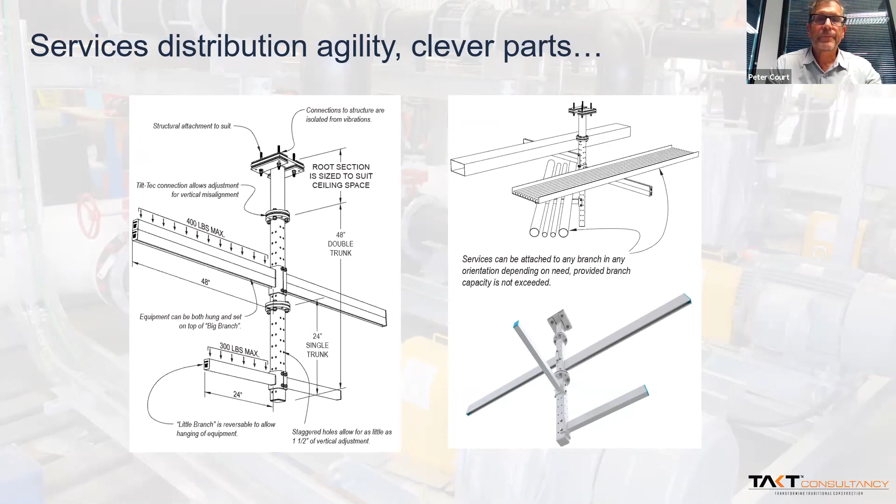Especially in hospitals, if you're waiting on technology selection and you don't know what you're going to fit in a certain space for a CAT scanner or whatever, you put these in and coordinate a space with these in. So it's easily reconfigurable and very easy to install.

Benefits assessment: there are benefits from a safety point of view, from a health point of view, where you haven't got people on site bending, twisting, lifting, carrying, so their long-term health improves - though that's difficult to measure. Quality is improved. As for time, my experience says that on paper you can save time.

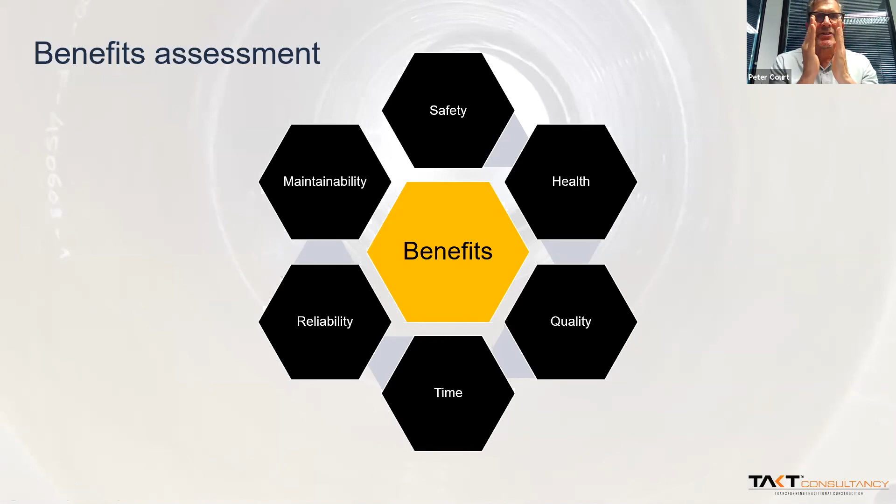DfMA gives you an insurance policy against overrunning, but I've also seen it the other way. So what do you use that additional betterment for? Probably to not compress commissioning, but it depends where DfMA is on the critical path. If it's not on the critical path, it might not give you an overall time benefit, but it might defend commissioning periods - it depends on the project.

Reliability of equipment should be the same, but I think it's in better condition when it's installed. If you've got built-in accessibility, and it's part of the BIM process, to make sure that everything's reachable and maintainable, etc.

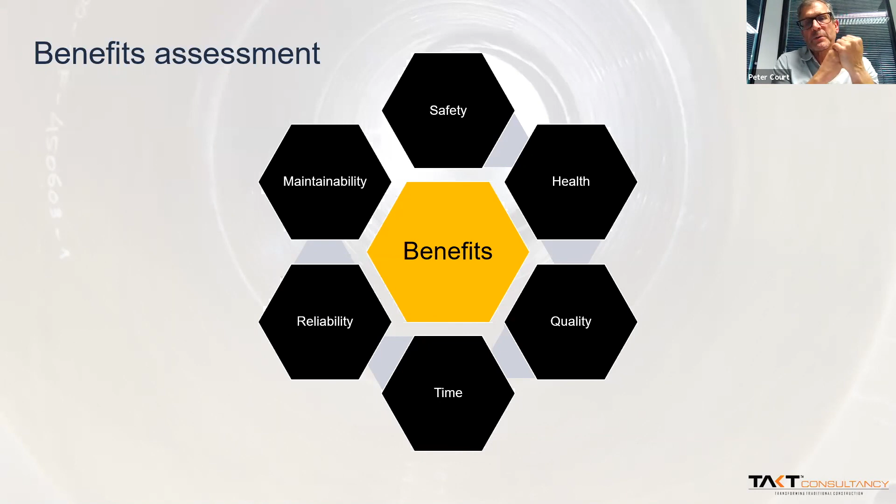And I think that's it. I could go on forever, but Margie will cut me off.